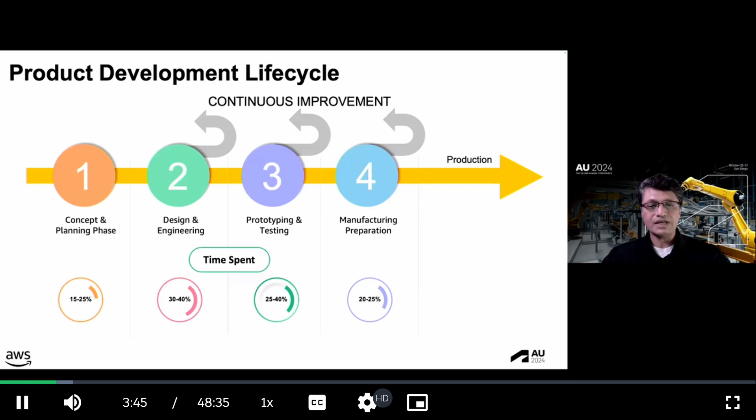And eventually you have production. This is not typically included in the part of the development timeline. Production is the culmination of all of the previous efforts. The initial production runs or the pilot production may overlap with the final stages of the development, but then full scale production continues as long as the product is in demand.

Now, let's examine the state of the product development lifecycle from a different lens. We use multiple tools and drawings throughout our product development lifecycle. In fact, our reliance on 2D drawings and PDFs - we find that many companies still heavily depend on these traditional 2D drawings and PDF documents for design communication and so on. There is a lack of digitization of legacy designs. Older product designs often exist only in paper form and outdated file formats.

It's time consuming model creation and analysis also. If you want to create detailed 3D models, performing complex analysis can be extremely time intensive, often leading to bottlenecks in the development process. Also, designs are becoming more and more complex. As products become more sophisticated, designs are growing increasingly complex and they require more time and expertise to develop and validate. And integration challenges in the manufacturing itself.

There is sometimes a disconnect between the design and manufacturing teams, and this leads to designs that are difficult or costly to produce. There are time to market pressures, and so companies face intense pressure to reduce development times and get products to market faster, sometimes at the expense of thorough design and testing. There is also the knowledge transfer issue. As experienced designers retire or leave, companies struggle to retain and transfer the valuable knowledge and expertise to newer team members. There is also limited design automation.

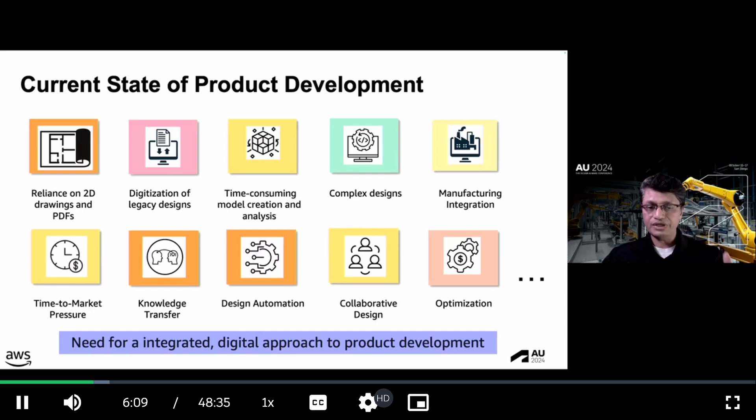When it comes to collaborative design, there are some hurdles. If it's a global team, they always face challenges in effectively collaborating across different time zones and locations. Then there is the constraint of optimization. Traditional design methods may not fully leverage advanced optimization techniques, potentially missing opportunities for performance improvements. So there are these multiple challenges that we encounter in the product development lifecycle. There is a need for an integrated and a digital approach to product development, which we do see today, but there are opportunities for improvement.

Now, what are some of these opportunities for infusing AI, artificial intelligence, into the product development lifecycle?

First, in transforming engineering workflows: AI can automate tedious and repetitive modeling tasks, freeing up engineers to focus on higher value work. Rapid prototyping and iteration enabled by AI can lead to faster design cycles and more experimentation. Additionally, AI-driven knowledge management can facilitate sharing best practices across teams and projects, preventing reinvention of the wheel.

Second is complex assembly modeling. AI can intelligently break down intricate assembly requests into manageable subtasks, improving efficiency and reducing errors. AI-driven optimization can ensure parts are designed for optimal manufacturability, performance, and cost effectiveness. Smart assembly planning and constraint management are also other features of an AI-driven process.

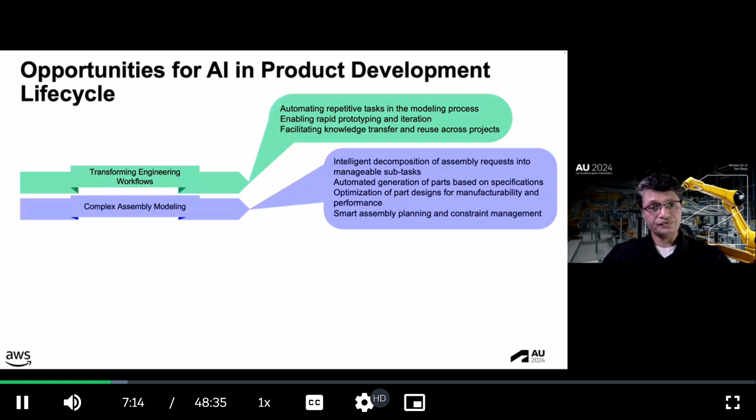Third, in enhancing human-AI collaboration: how can AI act as a force multiplier for human engineers, providing intelligent assistance and recommendations? AI-generated design alternatives can spark new ideas and augment human creativity. By offloading routine tasks to AI, engineers can focus their cognitive efforts on more complex and more strategic problems.

Finally, in driving efficiency: AI can enable exploration of vast design spaces, and that's clearly done by Autodesk today, that would be impractical for humans alone, leading to novel and innovative solutions. Faster iteration and testing cycles driven by AI can accelerate the refinement of design concepts. AI-driven optimization can improve product quality by identifying and addressing potential issues early in the development process, reducing costly rework and delays.

So, these are all the opportunities that we have for infusing artificial intelligence into the product development lifecycle. In the remaining slides, we will explore the role that generative AI can have in the product development lifecycle. But let's first provide the audience with a quick primer on what generative AI is all about.

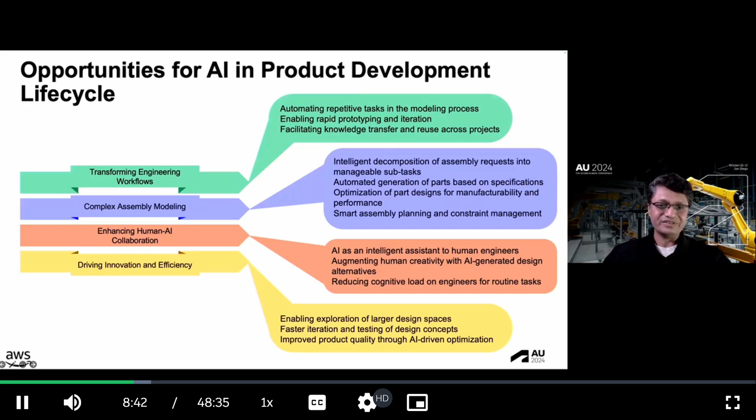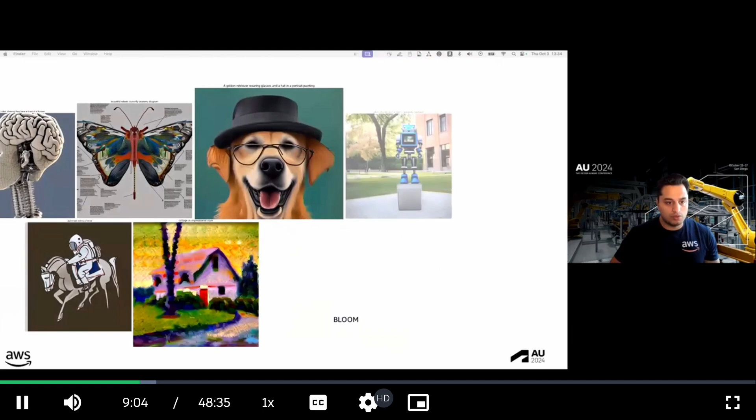Today, I will talk about what are the promises of generative AI. But before we get into the promises and how generative AI can revolutionize this industry, let's talk about what generative AI is, to set the stage.

Generative AI has recently taken the world by storm because of the capabilities it is capable of doing. You can use generative AI—most of us have already explored ChatGPT, Bedrock, a couple of applications that you can access generative AI from as of today. But what all it can do: it can create new content, new ideas, it can totally introspect your conversations, and create new images and videos. All this is powered by large language models, pre-trained on a vast amount of corpus public data, which enables these models to take care of wide use cases.

It is important to note that at the core, generative AI is leveraging the latest advancements in machine learning. It is not magic, but the latest evolution in a technology that has been evolving. What makes foundational models special is that they can perform so many more tasks because they contain such a large number of parameters that make them capable of learning complex concepts. And with the pre-training exposure to internet-scale data in all its various formats and patterns, foundation models can apply their knowledge with a wide range of contexts, and that opens up the avenue and opportunities to explore different use cases with generative AI.

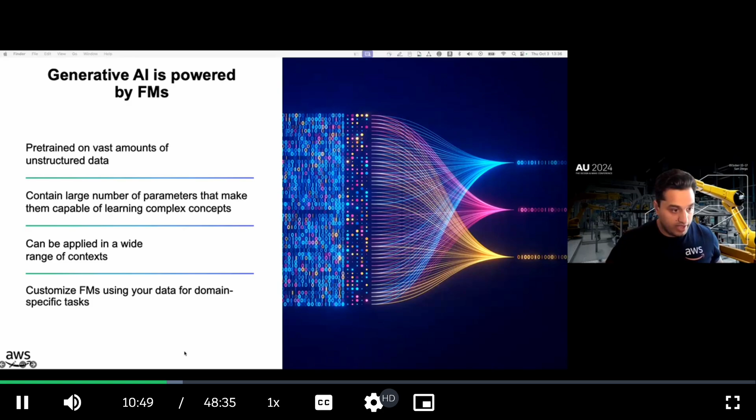How is generative AI different from a machine learning model? The size and general purpose nature of foundational models makes them different from a traditional ML model, which typically performs for a specific task, like analyzing text or sentiments, classifying images, and forecasting trends. In order to achieve each task with an ML model, customers need to gather labeled data, train a model, and deploy that model. But instead, with a foundational model, instead of gathering labeled data and training multiple models for specific tasks, you can actually use a pre-trained foundational model to adapt to several tasks.

You can provide unlabeled data and let the foundational model do the magic because of all the training that has happened in the past. The foundation model can also be customized to perform a domain-specific function that is differentiating to your business.

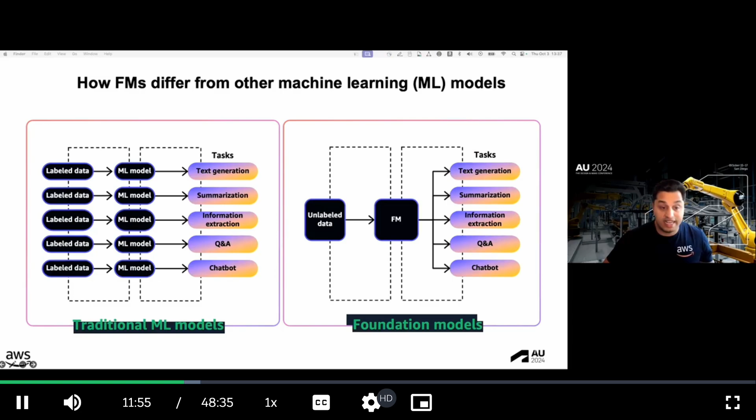There are a couple of types of foundational models today and capabilities within generative AI. A few of them we have categorized as text-to-text, where you give text as an input and the response from the model is also in the text modality.

You can also use text to embedding, which is very commonly used for chatbots empowering application patterns, where you are creating a numerical representation of the user's natural language text so that you can find the semantically same responses as a model output.

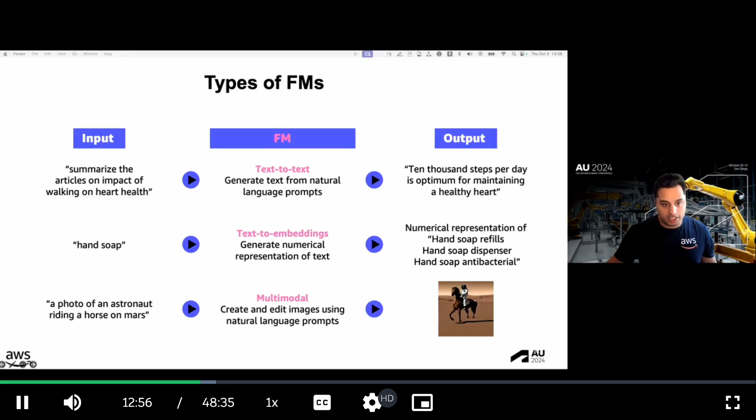And finally, multimodality, where you are enabling users to talk to the model in different data formats, being it audio, video, or text, and you can have the model response in a different modality of data. These are the different advancements in generative AI, opening capabilities for industries to transform their business.

Generative AI overall has an immense potential to create significant business value across various aspects of your organizational operation. First, the category is new experience. Generative AI can enable innovation in engaging ways with your employees, customers, and contractors, involving personalized content, tailored conversation, or immersive virtual environments leading to enhanced user experience.

Secondly, productivity. Generative AI has potential to radically improve your efficiency across all lines of business. By automating content generation, streamlining workflow, and augmenting human capabilities, generative AI can significantly reduce time and effort spent on repetitive tasks.

Third, extracting insight. Generative AI can unlock valuable information and clear answers from an organization's vast corpus of data sitting in your data stores. By intelligently processing and analyzing this information, you can provide actionable insights that enable faster, better decision making and give an organization a competitive edge.

Finally, fostering creativity. Generative AI can serve as a powerful tool for creating new content and ideas, including conversations, stories, and even model images, which we will see in our demo today.

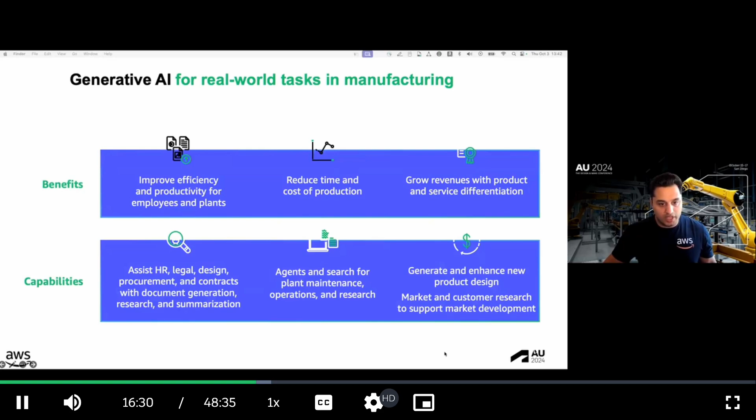Agents and search for plant maintenance can be very well taken care of using agentic generative AI. And finally, you can grow your revenue with product and service level differentiation. You must have witnessed a similar trend within Autodesk as well, where empowering AI shows differentiation in their product segment compared to the competitor landscape.

Now, the big question is how to get started and actually build a toolset of generative AI for your business use case. You can use Amazon Web Services to start building up your generative AI use case.

At Amazon, we work backward from our customers, so we offer you a stack of services that is considerate about your experience, how much your development effort is, and how to get started. If you look at all our overlying services and offerings, we have categorized them into three big buckets.

The bottom layer is the infrastructure for training and inference. At Amazon, we offer the latest GPU chips, the latest compute, fastest storage, and a managed machine learning platform system popularly called SageMaker, to build your whole machine learning lifecycle and host and infer your foundational model to power your generative AI applications. This stack of services is specifically meant for users who have a good understanding of underlying hardware, infrastructure, what model to use, and how to deploy it efficiently.

If you want a more abstracted experience of building your generative AI solution, we offer the middle layer, which is Amazon Bedrock.

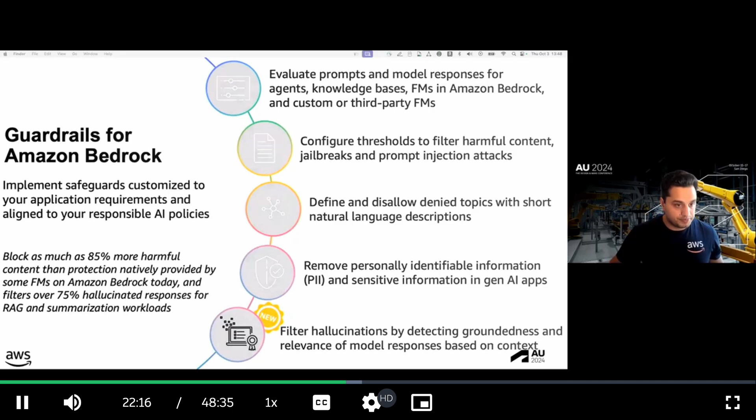Finally, that's the top layer of the service, which is Amazon Q. Let's say with Bedrock you have to build a solution with underlying infrastructure, but we're also targeting personas like product managers who don't want to invest too much time and just want to get started. That's where we built Amazon Q.

Amazon Q is our generative AI powered assistant that helps make your organization's data more accessible without writing code. It can write code, answer questions, generate content, solve problems, and even manage your AWS services. Q is built with security and privacy in mind from the start, making it easier for organizations to use generative AI safely.

It maintains access control of your data, and if your user wants to access Q outside the AWS ecosystem, they can do that too. For business users who access Q via subscription, no data is used to improve the underlying foundational model for anybody but you. It's all being trained by you.

Q is right now integrated with the majority of your data sources, from Snowflake to S3 bucket to ServiceNow, wherever the majority of our customers are storing their data. You already have a native integration where you can bring that data and have this experience ready for your users.

Amazon Q right now comes in five different flavors. We talked about Q for Business, which integrates with your data sources and gives you a chatbot experience on whatever data is stored within you.

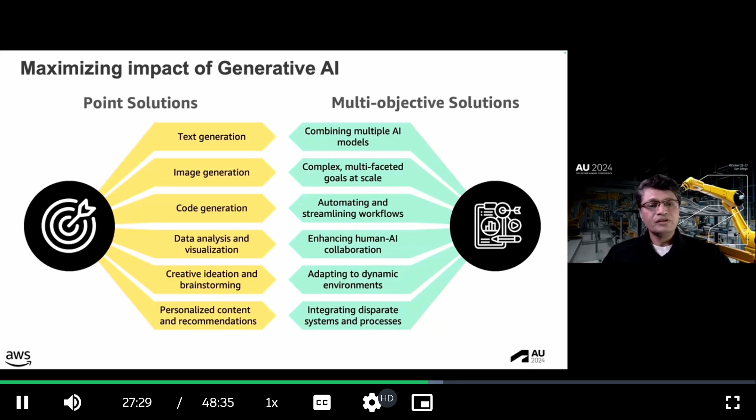Now, these are still valid use cases, and so these are still very important, but the true power of generative AI and the true impact of generative AI from our perspective will actually come from these multi-objective solutions. So how can you combine multiple AI models together to address multiple different objectives? Can you think about complex, multifaceted goals at scale? Can you look at workflows and try to automate some of those?

In fact, that is something that we'll be showing a little later today. Can you enhance this human AI collaboration? This is again a theme for what we'll be showing later today. And adapting to dynamic environments and also integrating with disparate systems and processes. So, while we have been looking at these point solutions from the perspective of generative AI thus far, we believe that the maximum impact of generative AI will actually come when we kind of expand our horizon of what is possible with generative AI.

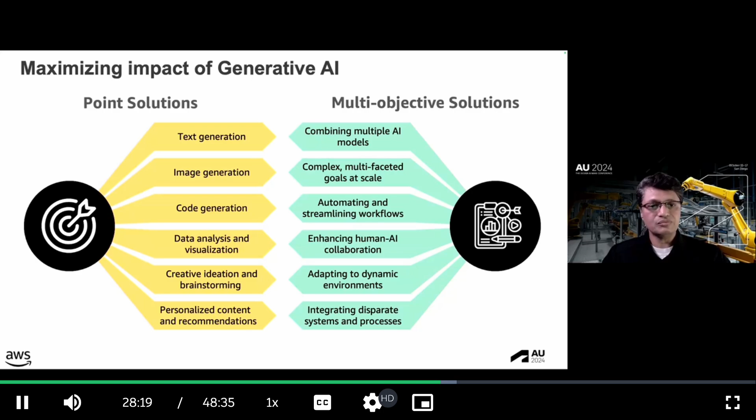Now, what we will do in the next few slides is to go over this very interesting generative AI assistant that we have built to address certain key aspects of the product development lifecycle.

Now, our story begins with a company that has designed a butterfly valve. However, before this design can be realized, a series of intricate steps must be executed. First, the concept design must be evaluated and optimized to ensure its feasibility and performance. Regulatory compliance checks are also crucial, ensuring that the design adheres to industry standards and codes.

Process optimization is key to maximizing efficiency and minimizing waste. The manufacturing workflow needs to be evaluated, and you have to identify bottlenecks and perhaps even suggest improvements to enhance productivity. You might want to create the tool path for manufacture and generate a detailed manufacturing schedule, and also help manufacturers coordinate their efforts seamlessly, minimizing delays and maximizing output.

You might also want to create technical documentation around the product that you have just designed. And finally, you might want to integrate this within the PLM system, a product lifecycle management system. In this case, it could be Autodesk Fusion Manage, or it could be other PLM systems as well.

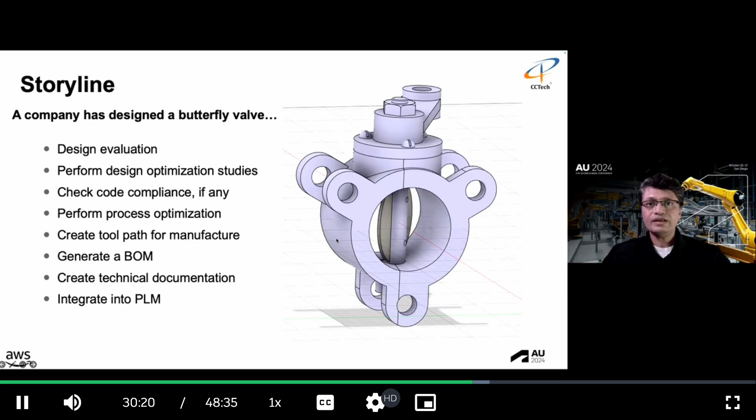Now, the intelligent assistant, and I have to remind you that this is an add-in. It is not a feature that's available within Autodesk Fusion. So I would like to make the disclaimer right here. It's an intelligent assistant that we can potentially use for product development.

Now, the way that this intelligent assistant works is that it uses information about the CAD model from within the Autodesk Fusion interface. It can leverage organizational knowledge bases. So if you have a knowledge base that is outside of Autodesk Fusion, how can you leverage that? It also leverages Fusion API documentation, and this is one of the most powerful features of this.

That is, it can call Fusion APIs to actually do some of the things that I will show you. Also, it can engage with, it can interact or integrate with the Fusion Manage PLM. And above all, it leverages Amazon Bedrock as its foundational capability to call foundation models and then use that within the context of generative AI intelligent assistant.

Again, this is not officially endorsed by Autodesk, and this will become available as an add-in in the Autodesk marketplace from our partner, CCTech.

So what our partner has done is basically they have integrated multiple aspects of both the plugin, both the front end aspects as well as back end, where they've leveraged a lot of AWS services, such as Lambda, such as Amazon Bedrock, and also Amazon S3, and also knowledge bases.

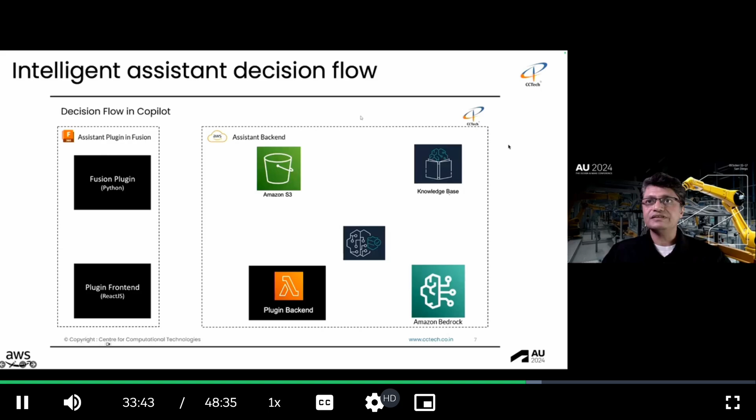Now let us look at this in action. So there are a few different steps that I had enumerated earlier. One is design evaluation.

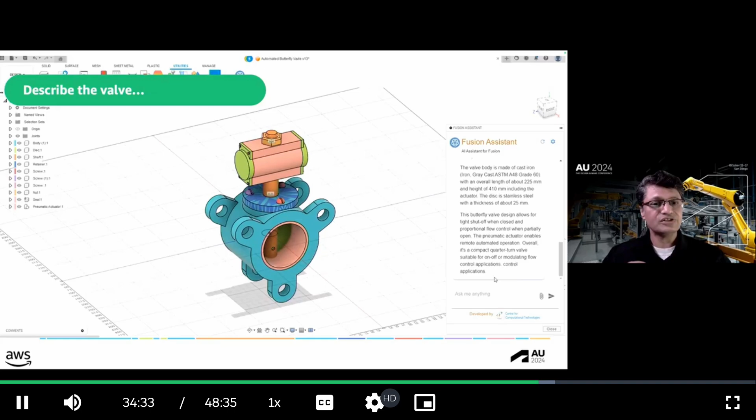So in the design evaluation phase, let's say you have a butterfly valve that's been designed. I just want to describe the valve, maybe as a user who likes to understand what the valve is made of and so on. So I'm just asking, can you describe a valve for me? And it provides a detailed description of the various parts, the materials being used for the butterfly valve, what are some of the key dimensions, and what sort of valve it is - is it closed on one side, and so on. So it provides a nice description of the valve if needed, and all of this is generated on the fly by the sequence of processes we just talked about - nothing is being typed, somebody's not typing this.

In the next case, we want to list the key dimensions of the butterfly valve. And again, very similar to what we just saw, you can go in and actually get all the key dimensions.

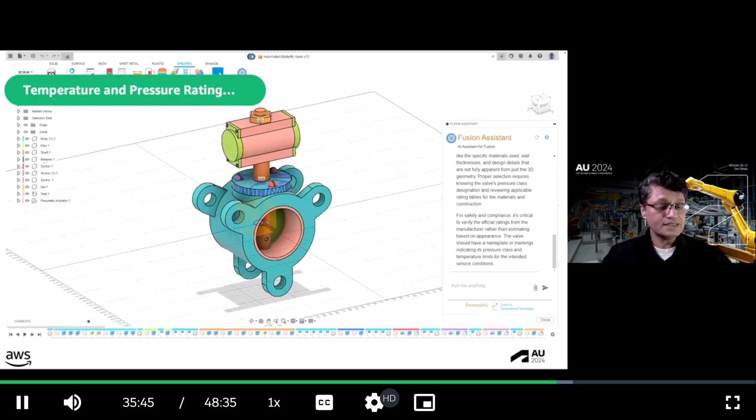Now, you might want to understand what the temperature and pressure rating of this particular butterfly valve is. In this case, the assistant looks at the valve and tries to figure out some of its dimensions and comes up with an approximate temperature and pressure rating. Now, this can be refined - this is not the end all for this sort of capability. But potentially, if you already have a catalog of butterfly valves that your company has made, you can refer back to that catalog and come up with a temperature and pressure rating that might be appropriate for this particular butterfly valve. So again, this is a way for the intelligent assistant to look into org knowledge bases and come up with a reasonable answer to the question being asked.

Optimization. So let's say you want to optimize the design. In this case, we're using a very simplistic view of what optimization really constitutes, but you can potentially do an optimization analysis of the butterfly valve or some of its components. In this case, what we're asking is, what will happen to the temperature and pressure rating if we change the shaft diameter by a small amount? Here it leverages both the capabilities of the large language model as well as some knowledge of the model itself, and it will come up with a reasonable answer. But here, again, potentially you can invoke an API from behind the scenes and do an actual optimization of the model itself. So even if the user is not an expert in design optimization, you can potentially orchestrate multiple processes behind the scenes in order to do the design optimization. That's the power of the generative AI assistant.

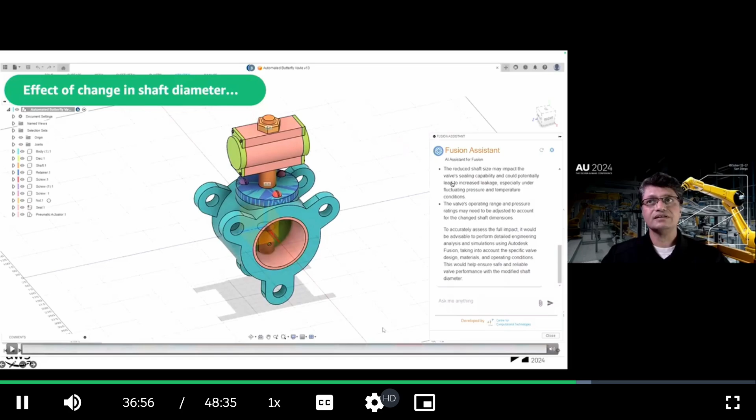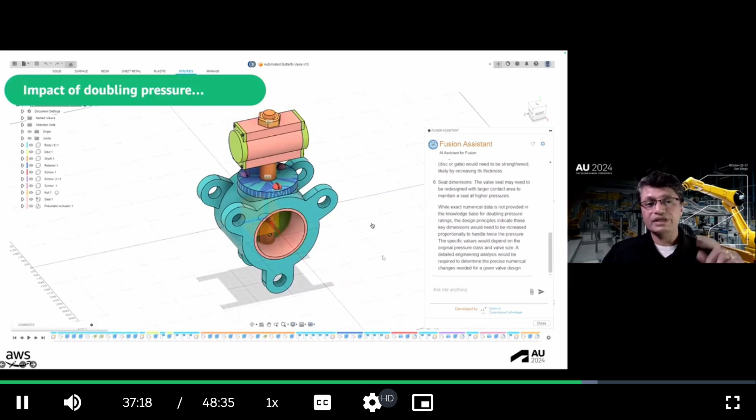Now, again, this is another example of looking at optimization from the perspective of, say, if I want to double the pressure, what is going to happen? And so the large language model will go back, look at the database, and figure out these are the potential problems that might happen if you increase the pressure, and so you might want to rethink the design a little bit.

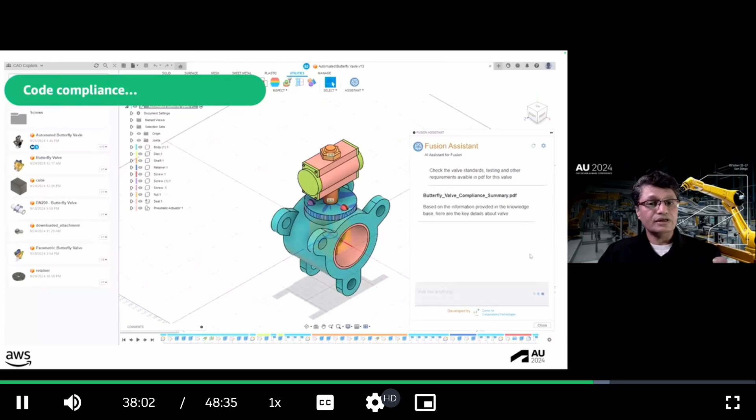Next comes code compliance. Code compliance is actually a very important aspect of design, especially in products such as valves or any sort of products that might impact human safety. So it is good for the designer to be aware of what code compliance issues might come up in the design of a particular product. In this case, what we do is check whether the valve standards are being met, and as you just saw, a PDF document has actually been loaded into the assistant.

Based upon the query, it would actually look through the PDF document. That's another capability of generative AI: it can look through the document, identify the appropriate places, and then come up with an explanation of what code compliance concerns might be there with the valve.

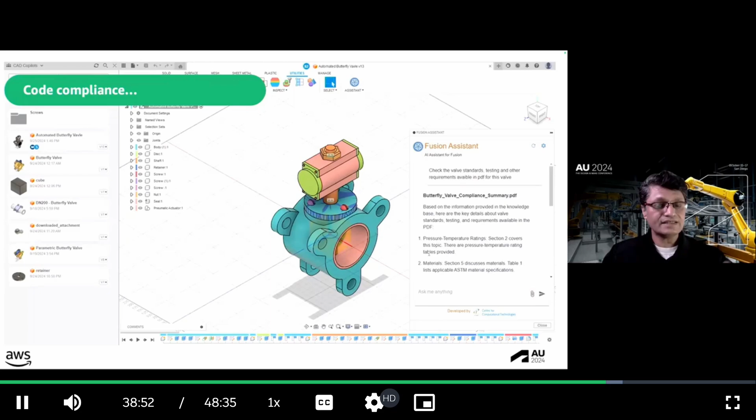In a future release, what we can potentially do is look at certain key dimensions of the butterfly valve and flag some of those dimensions, saying, hey, this particular dimension is out of compliance, you'll need to change this. This is a very simplistic view of the example, but you can think of the potential this has in designing more complex products.

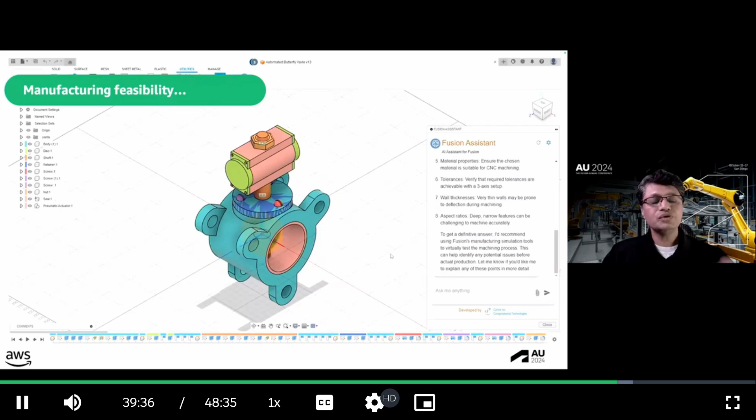Next comes manufacturing feasibility. Here you can potentially do tool automation and a simulation of how the tool will move as it manufactures a particular part of the valve. But in this case, we're just asking Fusion as the assistant to figure out how I can go about manufacturing this using a particular technique, and it will provide some insights into how potentially this can be manufactured. You can use tool path simulation, available within Fusion, to have a visual appreciation of how that manufacturing will actually happen.

The bill of materials creation can be done very simplistically. You just ask for a bill of materials for this particular butterfly valve, and it'll immediately spit out the list of parts, and it can actually export that to Excel, and now you have this bill of materials within Excel, which you can then use for any later activities.

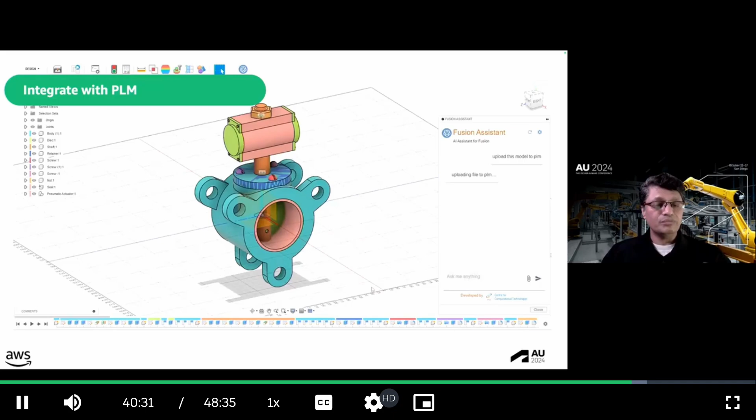You can integrate it to PLM. So once you've designed the part, say you want to integrate this into your PLM system, in this case Fusion Manage. You can simply ask: I want to upload this particular part into my PLM system. Whatever it does behind the scenes is kind of opaque to the user, but eventually what the user asks for actually happens, and you have the new part uploaded to Fusion Manage.

Also in the context of maintenance, there are so many different opportunities and examples of how you can integrate this assistant into the context of the product development lifecycle.

From the context of maintenance, currently it gives an explanation of how this butterfly valve will need to be maintained in the field. But think about having another knowledge base associated with the product. You can have the assistant go through the knowledge base and come up with a reasonable maintenance schedule for this valve based upon the dimensions. So you don't have to recreate all the technical documentation or maintenance manual; you can use the assistant to create that maintenance manual for you.

So these are all the various steps you can potentially accomplish with this assistant. There are multiple more versions coming up soon, and hopefully when you're at Autodesk University you might see a slightly different version. But this is the impact that generative AI can potentially have in the product development lifecycle.

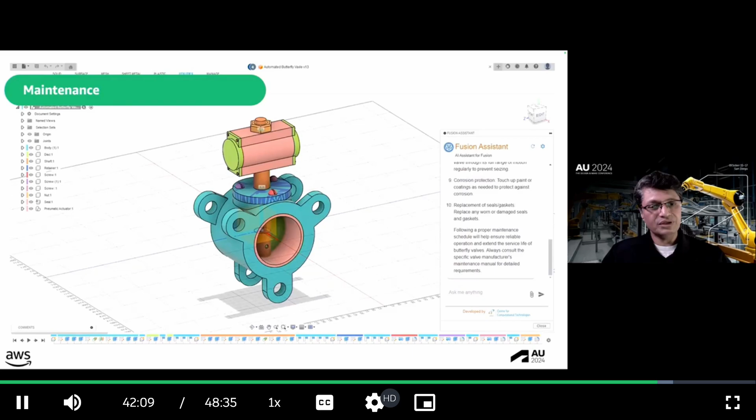Before I end this part, I'd like to quickly take you to another interesting demo we built along with CCTech, and I'll give it to Sahil. Since we talked about how generative AI can be used with Fusion, one use case we tried to solve, which has not been endorsed by Autodesk, is how generative AI can be integrated with Autodesk Construction Cloud. We see Construction Cloud as one of the leading project management tools for construction, but one integration we'd like to highlight is how, in the field, if you're using Teams, Slack, or any tool for team correspondence, you can interact with Autodesk Construction Cloud via Amazon Bedrock.

If you look at the overarching architecture from your team, your user is asking a natural query, and through Teams webhooks, we are making a prompt to Amazon Bedrock. Here is a point where we are using AWS guardrails, which will filter and parse what the user is actually entering to Bedrock, so that way you have a better guardrail or responsible AI solution for your overall integration.

Once Bedrock introspects and makes an understanding of the user prompt or integration, it will interact with Autodesk Construction Cloud through APS, and through interacting with APS, it will get the right data out from Construction Cloud, process the data back in Amazon Bedrock, and respond back to Teams.